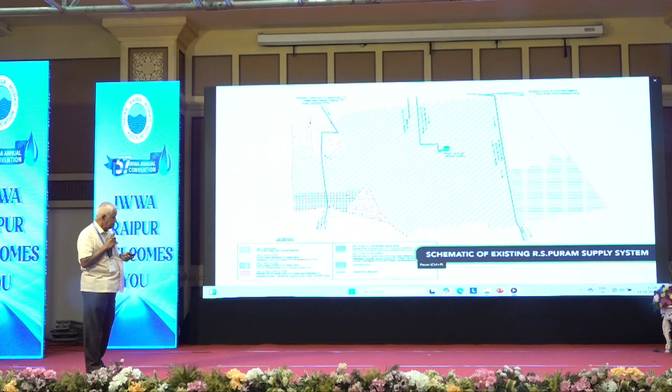All the water supply infrastructure were updated - the distribution pattern, everything. The existing flow pattern was measured using ultrasonic flow meters, clamp-on type flow meters.

Then also we did water quality analysis of the present system. All the data was updated on the GIS data and it is available. We can close the video.

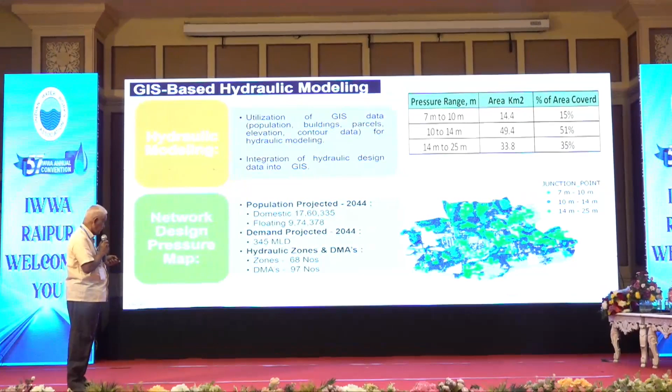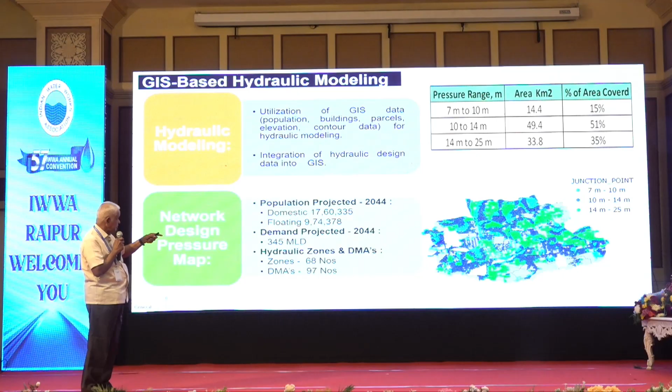Now you can see the project area which is having 7 to 10 meters requires only 15% of the area. The rest of the area has more than 10 meters head, as high as 25 meters in some low lying areas.

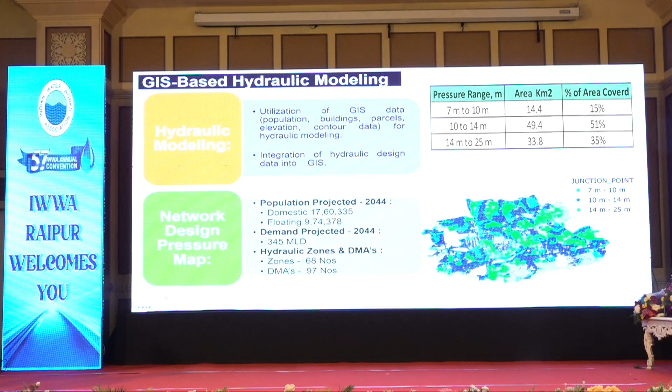The project has already completed about 85% of the construction work. Distribution network is 92% complete. Out of 1,747 kilometers planned, we have laid 1,630 kilometers. There are 1,50,000 existing house service connections, and the project scope includes renewal of all house service connections, including replacement of meters.

Coimbatore city had a metered tariff system with telescopic tariff since the 1990s. Our requirement now is to replace the existing distribution system with new consumer connections and new water meters. Originally they had type A, B type water meters; now we are replacing them with C type. We are not going in for auto AMR meters.

We are using multi-jet auto mechanical meters only. For the service reservoirs, out of 33 we have completed 25, and 8 are nearing completion.

33 DMAs with 51,250 household connections have been commissioned with 24/7 water supply, getting water round the clock. 19 more DMAs with about 27,000 household connections have also been supplied with the new pipeline, but 24/7 has not yet been effected there.

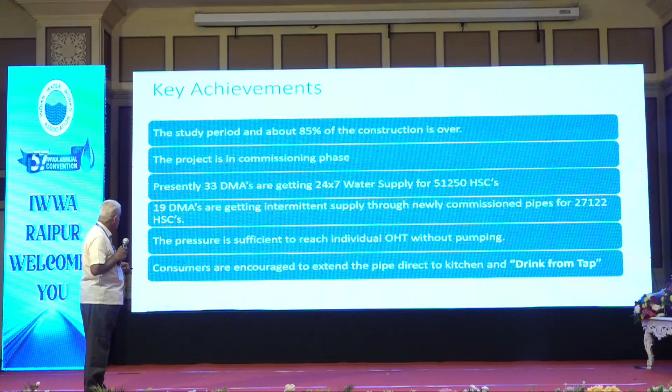The pressure is sufficient to reach individual household overhead tanks without pumping. No domestic pump needs to be operated.

Now we are in the phase of conducting awareness programs, requesting consumers to take the tap direct to their kitchen so they can use it as real drinking water from the tap, and also for internal consumption. For other uses, water reaches their individual household overhead tank directly, which can be used for bathing, washing, and other purposes.

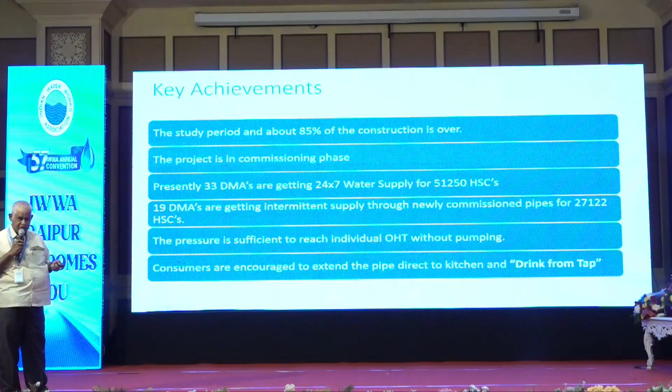The first DMA was commissioned in November 2021. Now NRW in the area ranges from 12.8% to 18% across these 5 DMAs, and per capita consumption is in the range of 74 LPCD to 112 LPCD in these 5 DMAs.

Our contract concession requirement is 7 meters residual pressure. Similarly, billing and collection, meter reading, billing and collection are also within the scope of the contract.

We took over billing since 2018 because of efficient operation, we could collect the old arrears also. In many years, collection exceeds the demand. In 2018, only 40% of the meters were read once in 2 months as per the bylaw requirements, but now 100% of the meters are read bi-monthly.

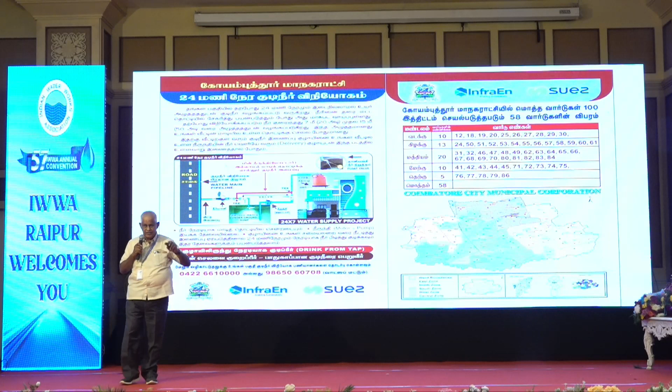This is our awareness program. We are canvassing every consumer to install a non-return valve immediately after the water meter, extend the consumer tap directly to the kitchen to drink from the tap, and let water reach the overhead tank. We install a float valve at the overhead tank so water will be available throughout the house continuously 24/7. This program is ongoing; we have already done it in different DMAs and are continuing to connect more.

In this project, instead of using AMRs, we developed our own metering reading app. The meter reader is assigned the area in which he has to take meter readings every day by the system. Neither the meter reader nor the consumer knows who will take the reading.

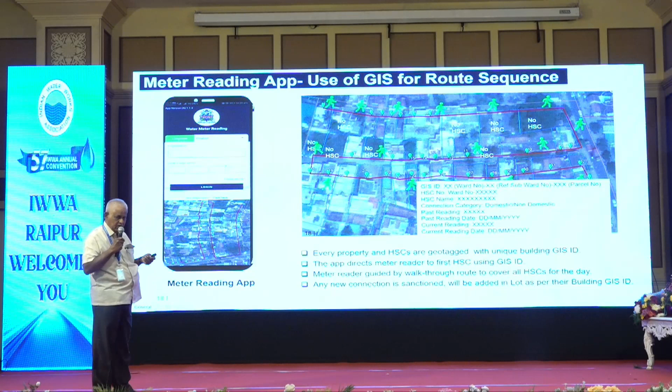During the study period, we integrated the meter location into our GIS, so the reader has to go to a particular meter and start there. At that location, his mobile phone will show all the data of the connection. Once he takes the reading and a photograph, it is sent via cloud to our database. Then he is directed by Google walkthrough directions to his next connection. Every day, depending on the area and demographics, a meter reader will take about 100 to 250 connections.

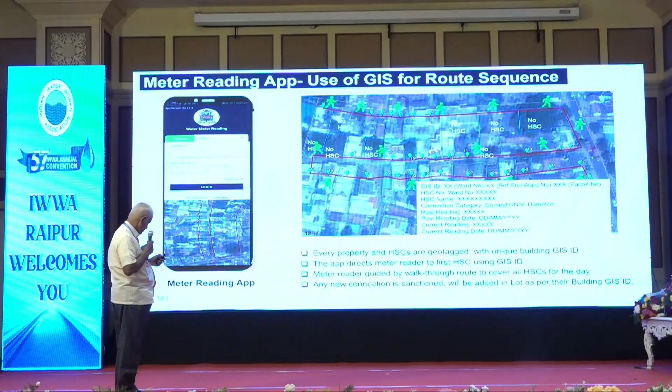And also, we are using that acoustic method of leak detection. We are using a listening stick or leak detector.

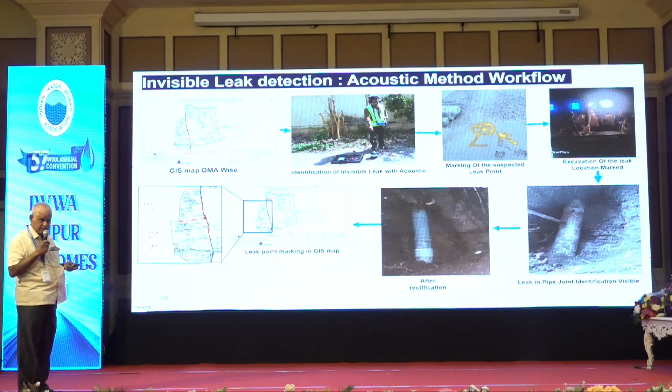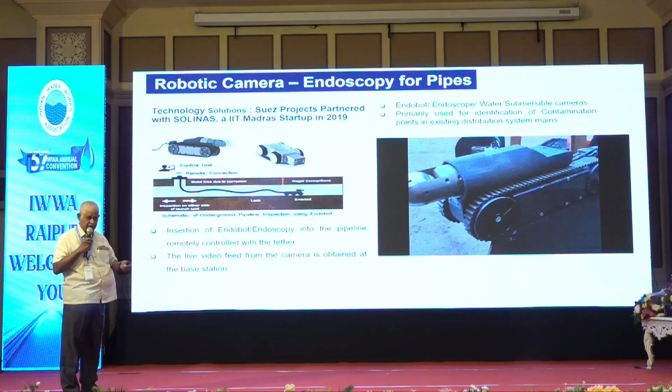And we are using the endoscopy startup from IIT Madras since 2019. In this model, the camera goes inside the pipe and identifies any defects and rectifies them. Mostly it is required to be used only in the existing network, which is very old. So for any contamination complaint or anything, we exactly identify the location, dig it and rectify. No need to dig along the road for identifying the leak.

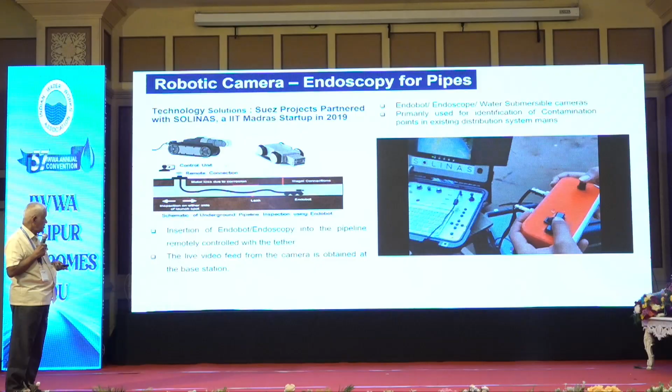It directly goes into the pipe with a camera.

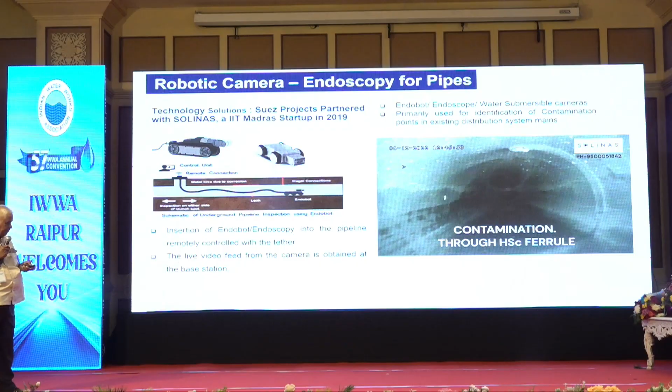In this case, external drain water is entering the pipe through an HSC pipe joint. And the pipe condition is also assessed. So at the house service connection ferrule, external water is entering the pipe. Tree roots inside the pipe.

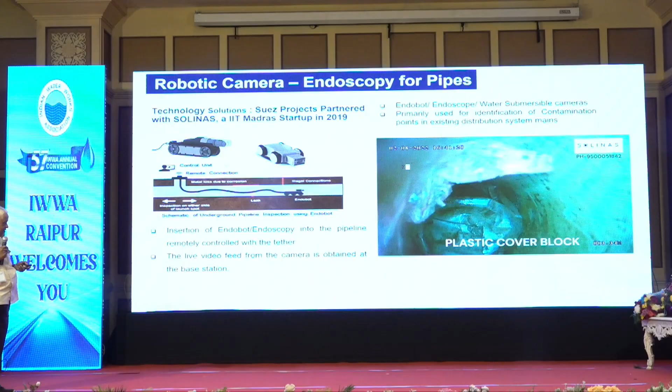Plastic cover, plastic bottle, identify everything, identify inside the distribution pipe.

Then we have developed an online monitoring of intermittent supply. This is not automatic, it's with manual data entry. With the GIS data, we have identified which valves control water to different areas. So whenever our operator operates a valve, he makes a data entry on his mobile phone.

Immediately it is updated on our screen, showing this area is getting water, like that. When he closes the valve, he makes a data entry on his mobile phone that it is closed. So every minute, under the intermittent supply system, we can see which areas get water, how many houses are getting water. It is live, varying.

We have developed our own water quality monitoring system also. As per the contract, under each DMA, 100 samples every quarter have to be identified and monitored. So now critical sampling locations have been identified in each DMA.

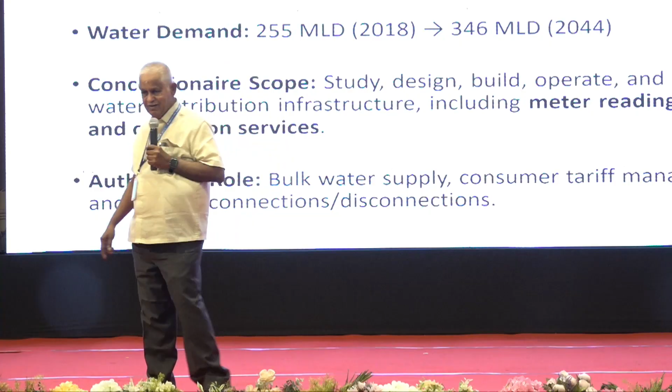For 24/7 supply, it is necessary to replace all old pipes like asbestos cement or PVC, as they are found to be mostly leak-prone. We have replaced all asbestos and PVC pipes with high-density polyethylene pipes where the size is less than 300 mm, and ductile iron pipes above 300 mm.

My question is, is it really necessary? Yes sir, our experience shows PVC and AC pipes are prone to leaks. We cannot ensure continued pressurized supply with those pipes. But our PVC or AC pipes are of the highest standard, so how can we say they cannot sustain it? They are as per standard, but that standard is not adequate to meet our pressure requirement.